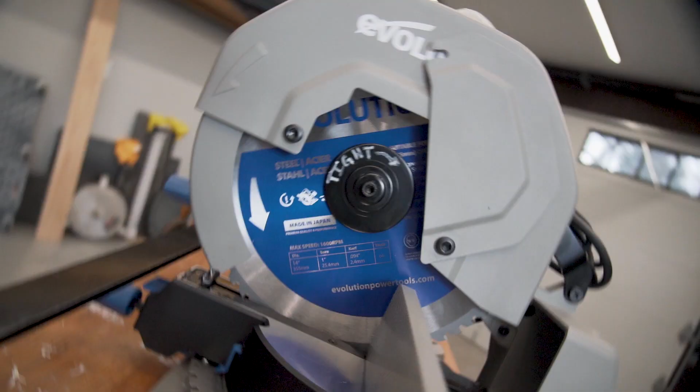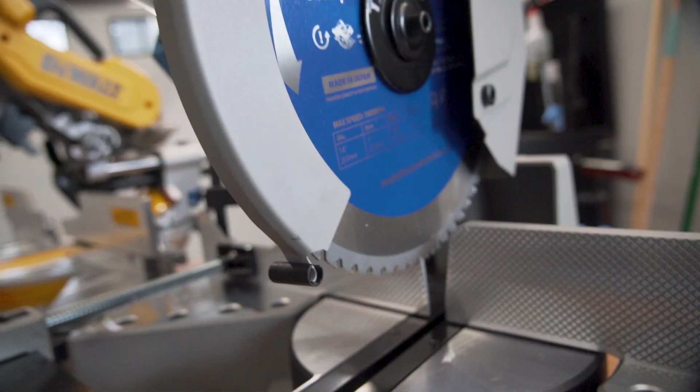Okay, enough of the B-roll, enough of the slow-mo. Let's introduce the stars of today's show. And before I do this, I just want to acknowledge I'm very privileged and blessed to be able to have these two pieces of equipment and start this shop build out. But without further ado, here's number one. Boom. Brand new, got a DeWalt 779, I believe. This is just a hardcore miter saw. We use them on job sites all the time. I'm a general contractor and these things just work.

But wait, number two. This one I'm really excited about. Right there, the Evolution mitering chop saw. So what we're looking to do today is take this saw and build the ultimate miter saw stand for both steel and wood. And it's gonna go right there.

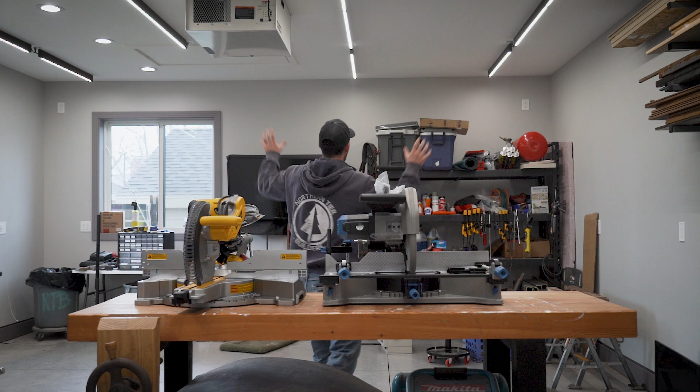Let's get started. So here's the story I think most of us can relate to. Too much stuff in just a horrible organization system. This shelving unit I thought was gonna be great, but in reality it's too deep. The holes on the shelves and the wire grates are too big, stuff falls through, rattle cans roll everywhere. It's on wheels, but I can't move it because there's just too much junk.

So everything along this wall is gonna get totally scrapped and rethought, and this is gonna be our miter station wall. Like I said, I've got 20 feet. It's not quite as much as I'd like, but it's gonna work just fine. We're probably gonna have about 10 feet of in-feed and then 6 feet of out-feed for both the saws. So if I need to break something down that has a longer drop than 6 feet, that's fine. I'll just cut it with a circular saw or a jigsaw.

But for most working lengths of pieces, this is gonna be great for what I need. So, two saws, we're gonna go along this back wall, and then we're slowly gonna build out storage around everything.

Are you getting dizzy from all the different views? As you can probably tell, this is my first YouTube video in a really, really long time. All the cool kids are doing it, so may as well jump in.

So, what I'm looking to do with these two saws is build one ultimate miter saw station. What I want is a fence on both sides that I can have some sort of stop block that clamps down to so we can make repeatable cuts over and over and over. I've had just a non-mitering, square cut version of this saw before. Actually was borrowing it from a friend for a really long time, about 3 years. And that was nice, but it was always on the ground, there was no outfeed support, and you could never make exact repeatable cuts. And if I'm gonna set this up, I'm gonna do it right once.

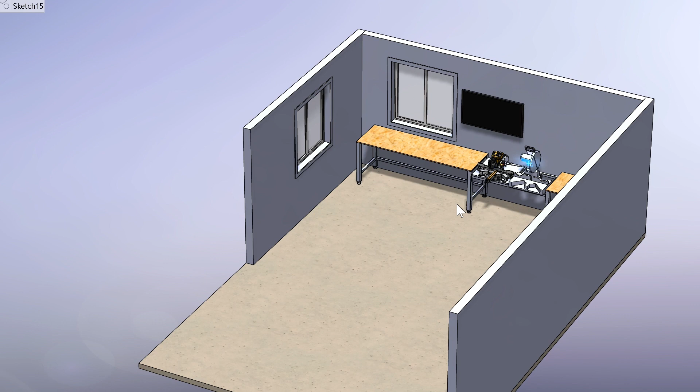Alright, I've got a habit of getting long-winded, so I'll try and keep this short.

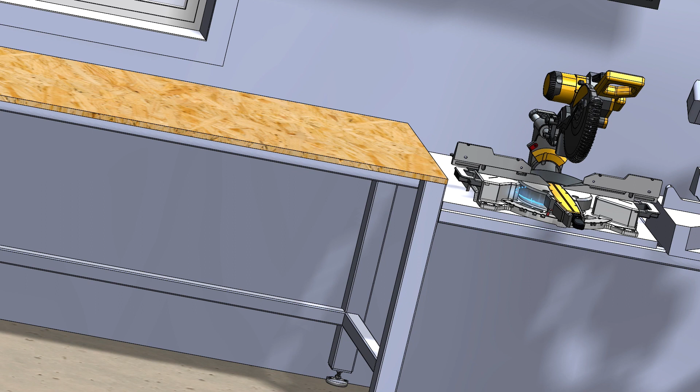Essentially what I've done is I've drawn the garage. I modeled the width, the height, and the windows, and these are all accurate to how it's built in space. The other thing I've done is I was able to grab this miter saw, this woodworking DeWalt saw, off of GrabCAD online, and then I've just modeled roughly the metal chopping saw, just so I have an idea of how things are going to lay out in space.

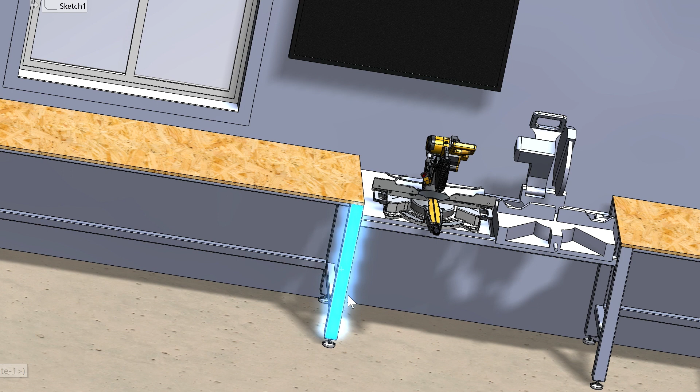What we're going to start by doing is building these two benches, and then we'll attach them with a stretcher. The first thing we need to do is build these leg assemblies. There's going to be 1, 2, 3, and 4 leg assemblies, and then we'll weld the stretchers to them. Then we'll make the tops and start bolting it all together. There's a whole lot we could get into here, but this probably gives everyone the rough idea of what we're looking to do, and we'll go from there.

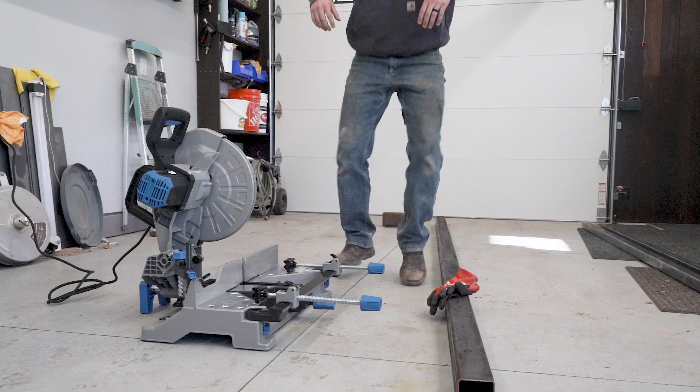And here we are. So as you can see from the computer models, we're going to start with 2 simple tables and a beam between them to put the saws on. Now, I know some of you are concerned about wood and sawdust and sparks, and while I may come to eat these words in the future, for right now, I'm not too worried about it. This is not a fine woodworking shop, and this is not a high-end metal fab shop. This is just a hobby shop for me, and I want to be able to come in here and get to work on projects. So, in order to build those benches, unfortunately, we're starting on the ground.

Now, you also may see the tubing in the plans, and also sitting right here next to me, and think, holy cat's paws, that is some heavy duty stuff. And you know what? It is. And that's for 2 reasons. One, I'd rather overdo than underdo just about everything. And two, I like the way it looks. So if you want to use smaller gauge tubing or smaller diameter, that's totally fine. But for me, this is my dream shop. I'm going to do it once. I'm going to do it right. I'm going to do it my way. So let's get after it.

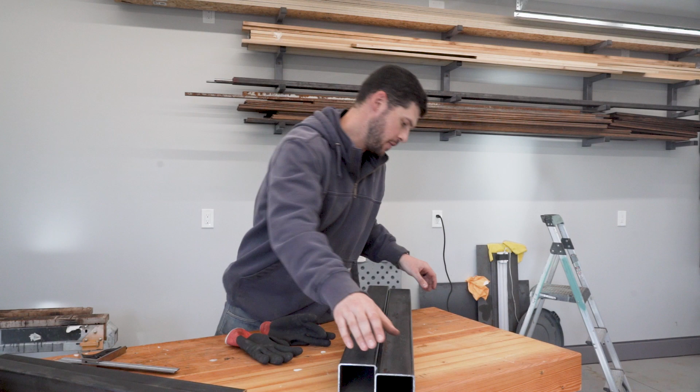So we've got our leg assembly here. Basically we've got our 2 stretchers and then we have our 2 legs here. So the legs are going to stand up like this, and then these stretchers will sit in between. We're going to have one down towards the bottom, and then obviously we'll have one right up at the top to support the countertop. Next up, we just have to lay out where exactly we want those. We can pull those measurements from the drawing, and I'll show you how I prefer to lay things out, and then we'll get to tacking this up, and pretty soon we're going to have 1 leg assembly done, and then I'll just buzz through the rest of them.

So let's get after it.

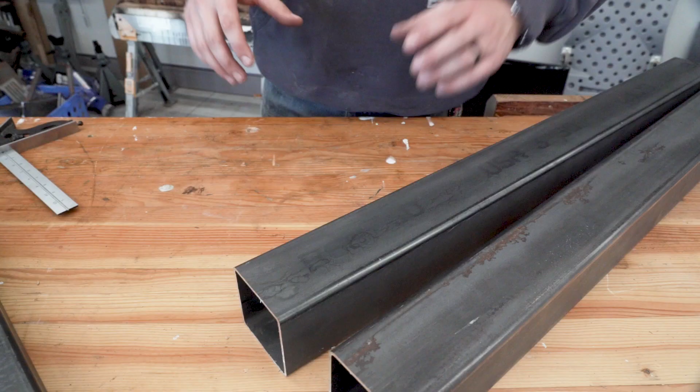Now, I don't know who came up with the morbid saying there's 1,000 ways to skin a cat, but there are. My preferred method for layout with metalworking stuff is a combination square and a scribe. This is just a hardened material scribe tip. I actually made this one in college in machine class, but I use it all the time.

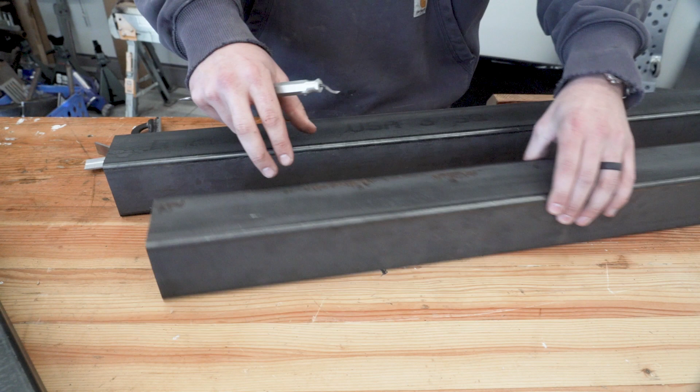Basically what we want is we are gonna set our bottom stretchers 8 inches up from the ground. We'll have some adjustable feet, so they'll actually end up a little higher, but for this case, we want to make a mark 8 inches from the bottom of the tube. If you were trying to be incredibly accurate on layout, you'd pull everything from maybe the top of the tube down in case the length of these tubes varied a little bit. But for what we're doing here, this is going to be pretty close.

So I've got my combination square set at 8 inches. All I'm going to do is simply take my scribe and make a little mark. Now, I don't know if that shows up on camera, but we'll just take that mark and we'll drag it all the way across. We'll do it on this other one. You can almost hear the metal just etching itself a little bit. Especially in this mill scale, it shows up really well to the eye. Like I said, I don't know if it shows up on camera, but this makes an incredibly fine mark for layout. Way sharper than a pencil, it doesn't rub off.

So we know that's where we're gonna weld the tube, and let's get everything mocked up. But anytime you can hide this seam on the tube, you want to try and do that. That seam, when painted, will stand out like a sore thumb. If you can feel it, you're gonna see it in paint. So if we can, we always hide these seams.

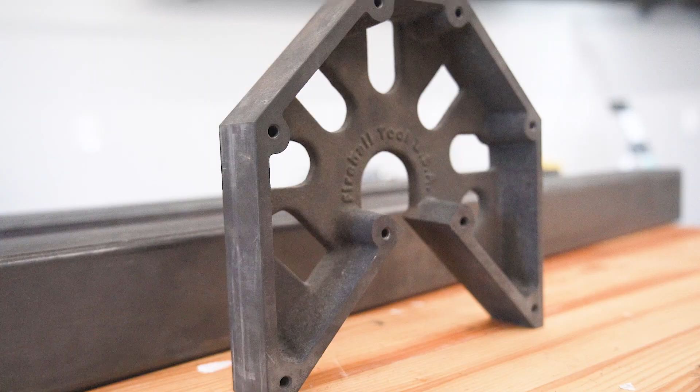Okay, now that we got everything laid out, I'm gonna introduce you to the other star of this show that makes fabrication so much easier. This right here, this is a Fireball Tool Mega Square. I believe it's the 8-inch Mega Square. Look it up, they make amazing products for fabricators. Basically, this gives us square clamping surfaces, and that's gonna allow us to clamp all this stuff together really easily and keep it all nice and square.

One of the biggest issues you can have when building something like this is either distorting into a parallelogram or any other random shape because you don't have 90-degree angles. So these are really gonna help us keep everything right where we want it to be.

Because this bench is not deep enough to get this whole project on here, obviously, I'm gonna position my clamps strategically so that the bench supports them. I'm not gonna weld it on here. I'll probably tack it on here so I'm not working on the ground, but then I'll jump down to the ground.

So put our pieces together loosely. We'll start clamping this thing together. Once again, weld seams are gonna be facing the wall on everything. And then on this tube, I want to put the weld seam down.

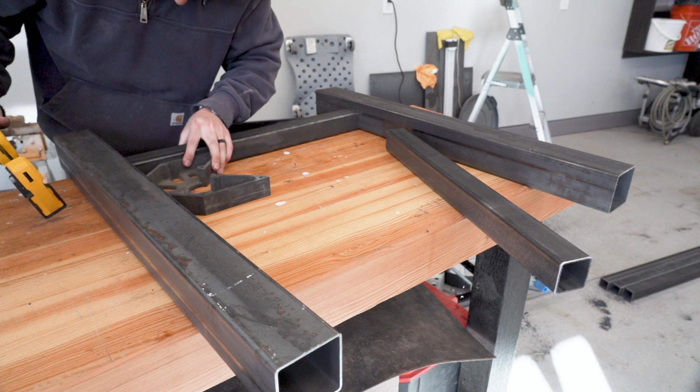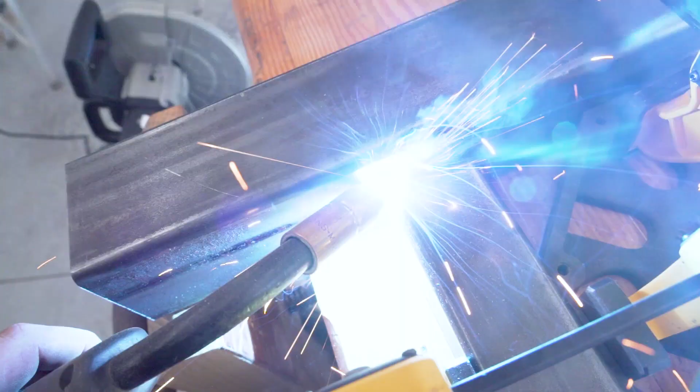We've got a few good heavy tacks on the bottom. I don't want to get too much heat built up into this part, especially before I get this top brace on, because it could pull these legs in. And I also don't want to melt the pads on these clamps. So I'm going to tack up the top stretcher and then we'll burn it all in.

The other style of clamp that works really well, even for bigger tubing like this, lets you really easily position and reposition things so you get it just right.

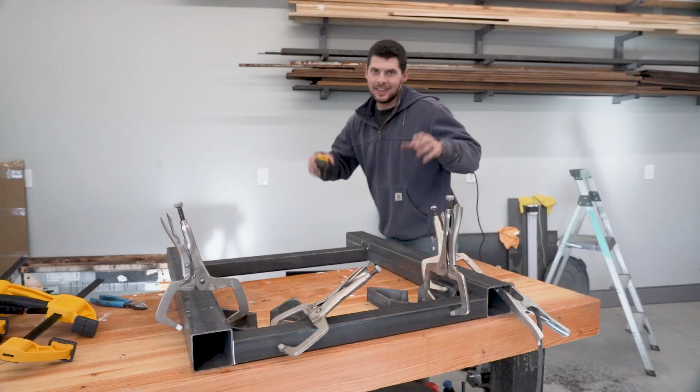Lastly, before we finish tacking this leg assembly together, we're just gonna check our diagonals. If those numbers are the same, then we know it's square. So, because this isn't rocket science, we'll just pull outside to outside here, 45 3/8. I'll pull the same measurement here, 45 3/8. It's perfect. Easy as that.

The squares, proper tools, good square cuts. It's just not that difficult.

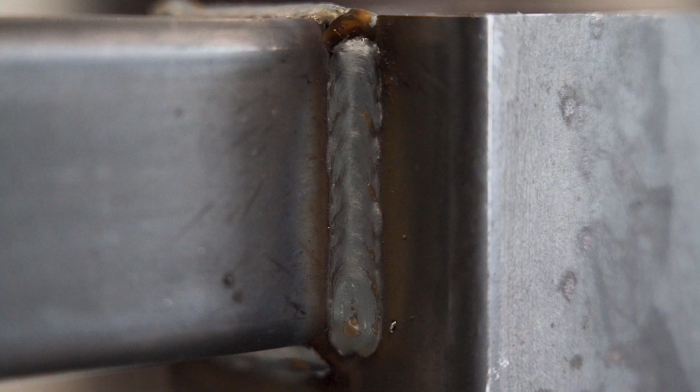Easy peasy, 5-10 minutes of welding. Here we go. A really sturdy start to a workbench.